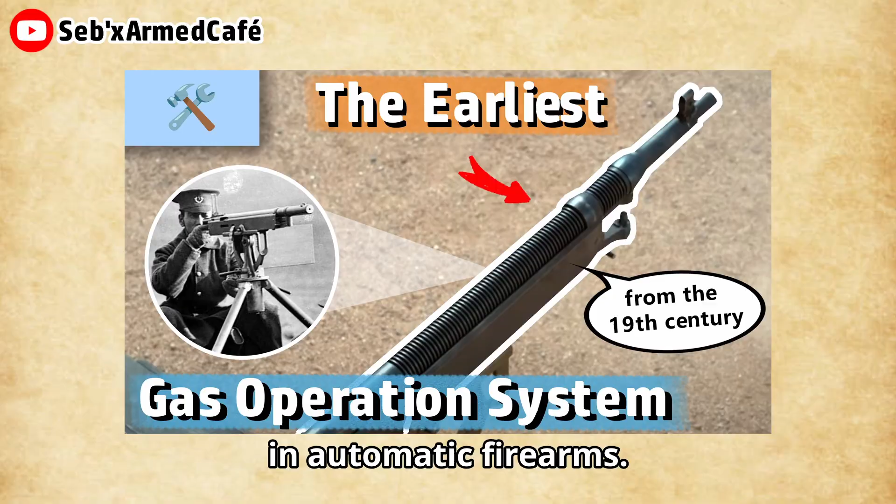Several days ago, we talked about the earliest gas operation system in automatic firearms, including the auto firearms of nowadays. Typically, there's a small hole on the barrel to let a part of the gas produced by the igniting gunpowder of the cartridge leak out, and then this gas can power the piston, which pulls the bolt back.

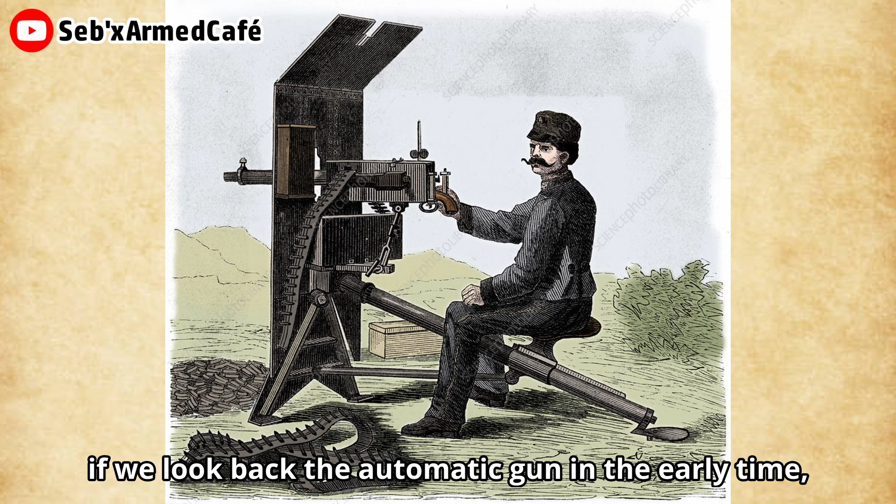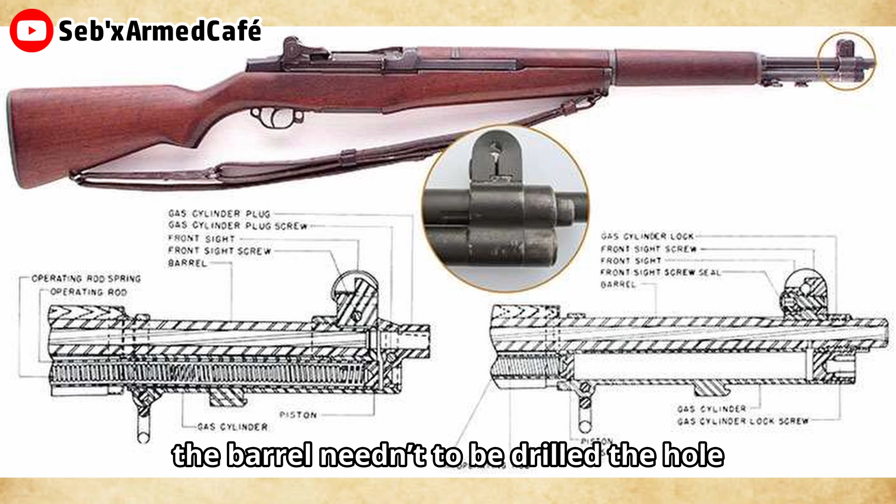This is the most popular gas operation reloading structure. But if we look back at automatic guns in the early time, we find that people had invented another device to achieve automatic reloading. Although it is also a gas operation system, the barrel didn't need to be drilled with a hole for this device. So in this video, let's talk about this gas trap.

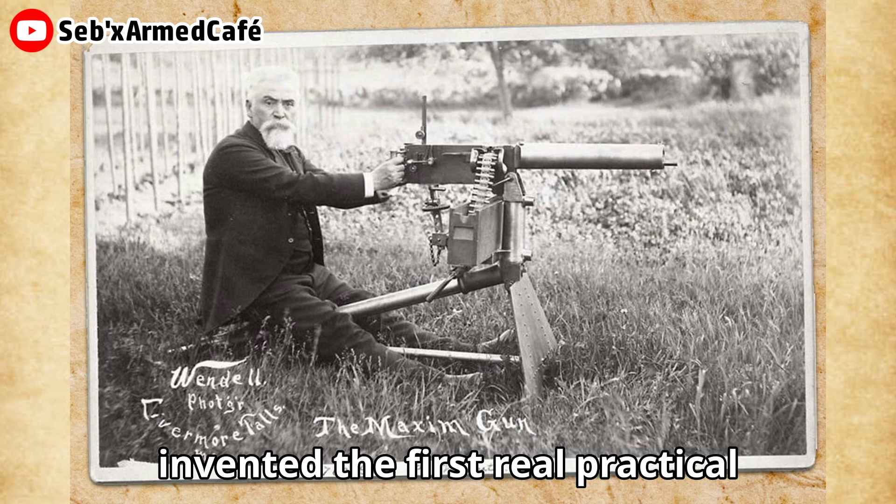If you want to learn about the first gas trap device, we need to go back to 1884. In this year, Hiram Stevens Maxim invented the first real practical and successful automatic machine gun. It's worth mentioning that in this 1884 Maxim machine gun patent, there may be a special cup system, and it was also painted in the patent, which says it might be the forerunner of the gas trap.

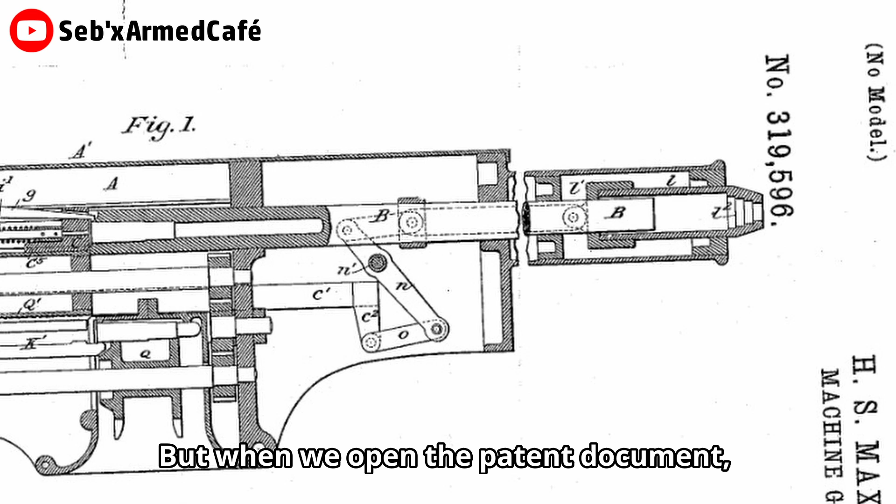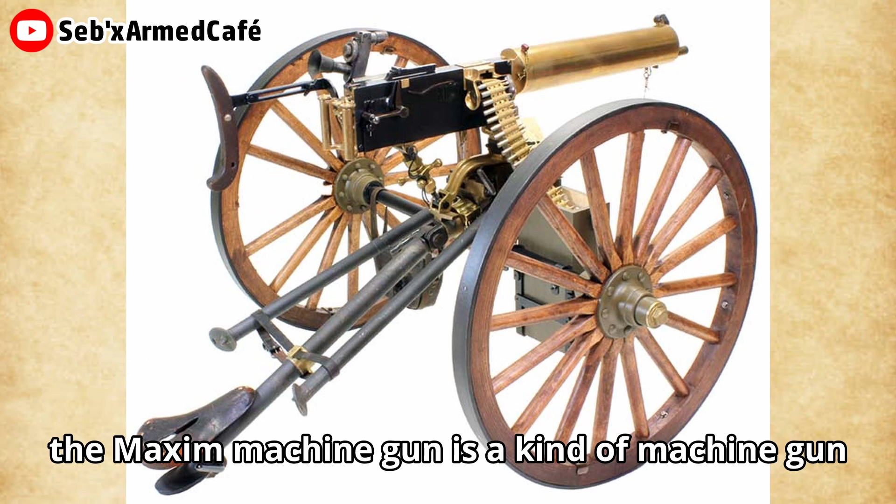But when we open the patent document, it may be very hard to find the same point between the Maxim machine gun and the real gas trap. Additionally, the Maxim machine gun uses a recoil-operated system, not a gas-operated system. So overall, I'm afraid this cup system might not be the real ancestor of the gas trap, but it might still have given inspiration to the gas trap designer. We may have to wait for historians to give us a better answer one day.

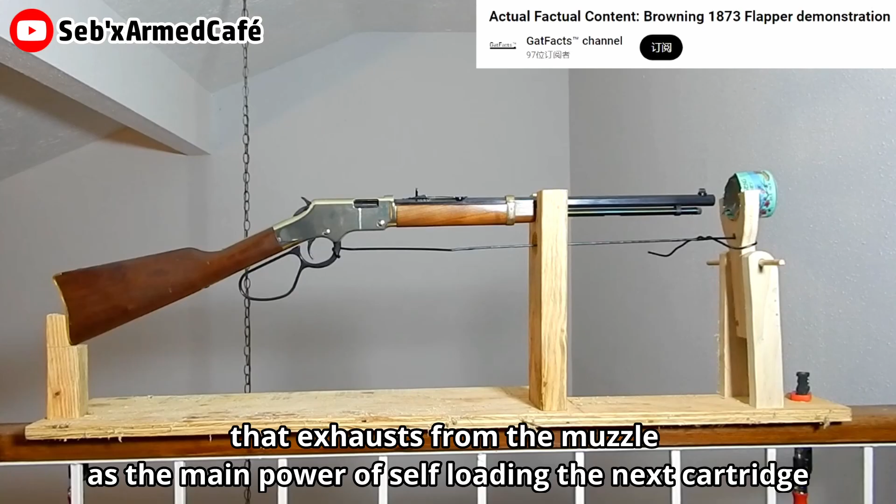What if we must find out which was the first prototype of the gas trap? I think it should be John Browning's flapper rifle. But we must notice that both utilize the gas that exhausts from the muzzle as the main power for self-loading the next cartridge. Both might not have a very close relationship though, because they had very different design ideas. When we see pictures of the flapper rifle and the rifle with gas trap, both just had a similar function in self-reloading.

Basically, the gas trap was used from the 1900s to 1930s in history. For example, according to John Garand's original design as adopted in 1936, the early models of his famous M1 Garand rifle used this gas trapping system. Apart from the M1 Garand, other early semi-auto rifles like the M1922 Bang rifle, the General Liu rifle from the 1910s—both mentioned in my Old Gun Daily Series posts—and also early models of the Gewehr 41 and early versions of the Fusil Mondragon, also known as the Mondragon rifle, have used the gas trap.

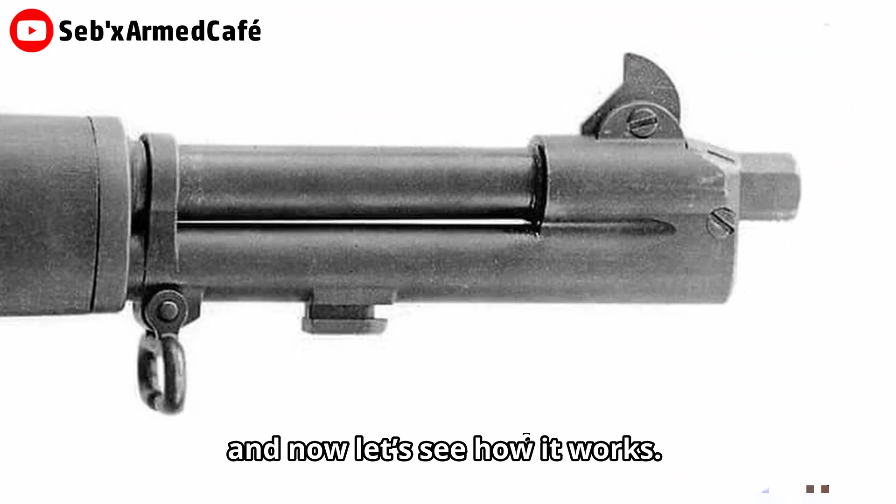When the time entered the 1940s, the gas trapping system was less and less used on new automatic rifles. But why did people decide to abandon the gas trap? We will talk about the reason in the third chapter. And now, let's see how it works.

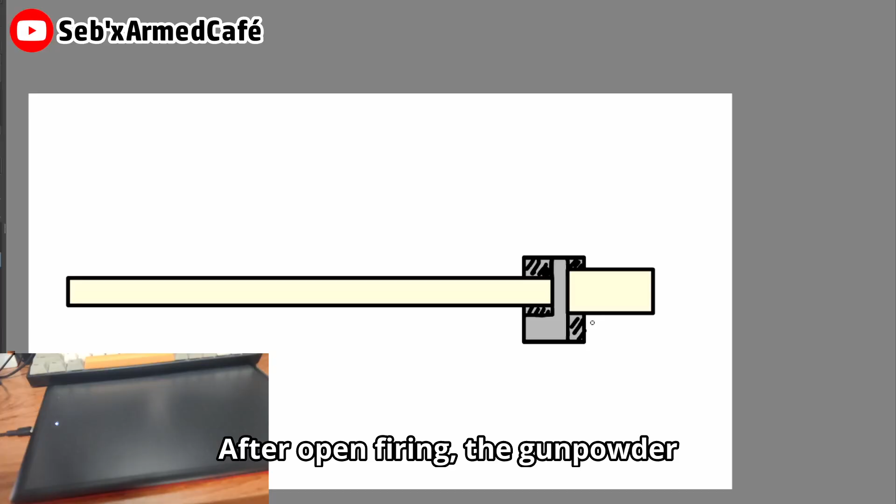The gas trap can be identified as a kind of T-valve for the gas. After open firing, the gunpowder produces a mass of gas, and the gas goes along the inside of the barrel. When the gas arrives at the muzzle location, because of the gas trap set on the muzzle, some gas can be trapped.

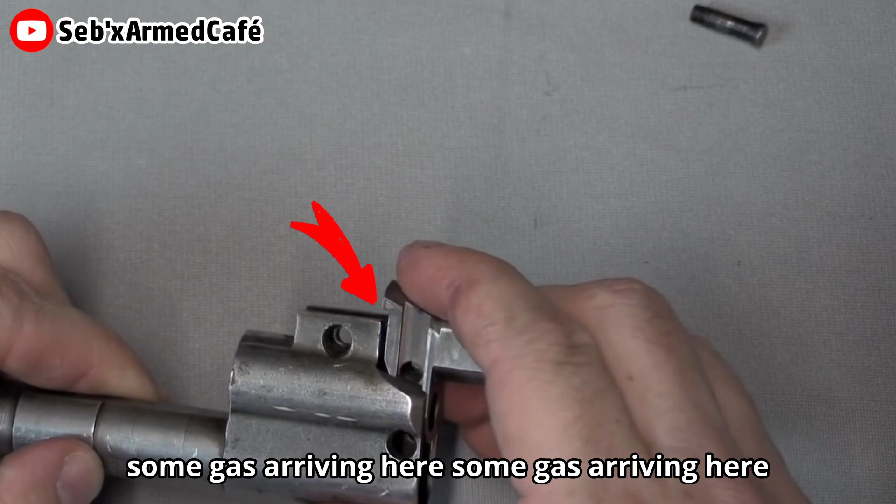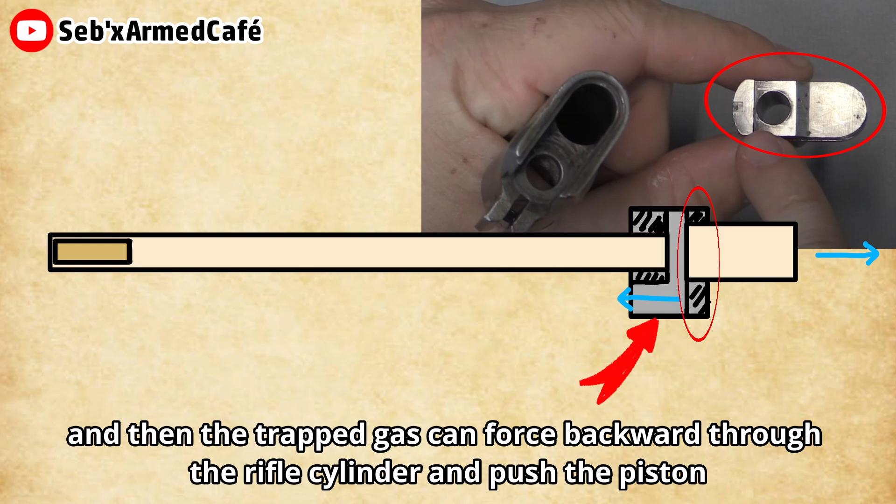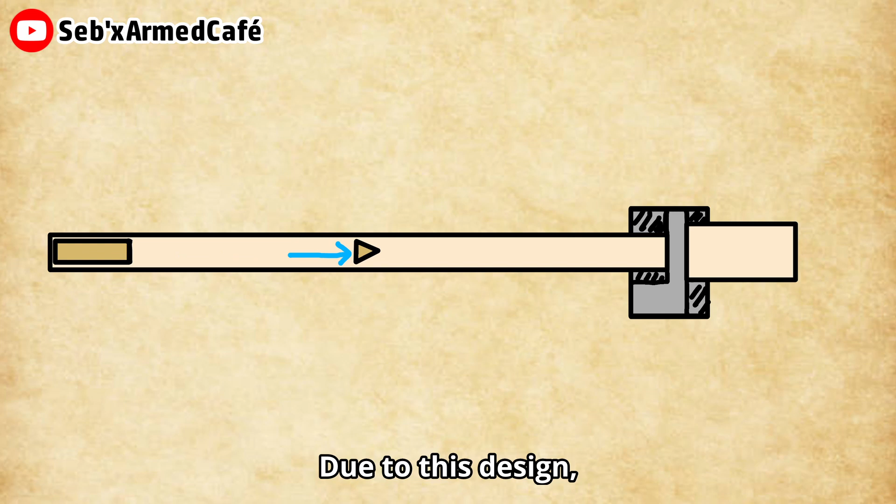In other words, some gas arriving here can turn its direction and go down through the inside space. This part of gas is called the trapped gas, and then the trapped gas can force backwards through the rifle cylinder and push the piston to pull the bolt back. Now the rifle can load the next cartridge. Due to this design, the gun didn't need a hole drilled on the barrel.

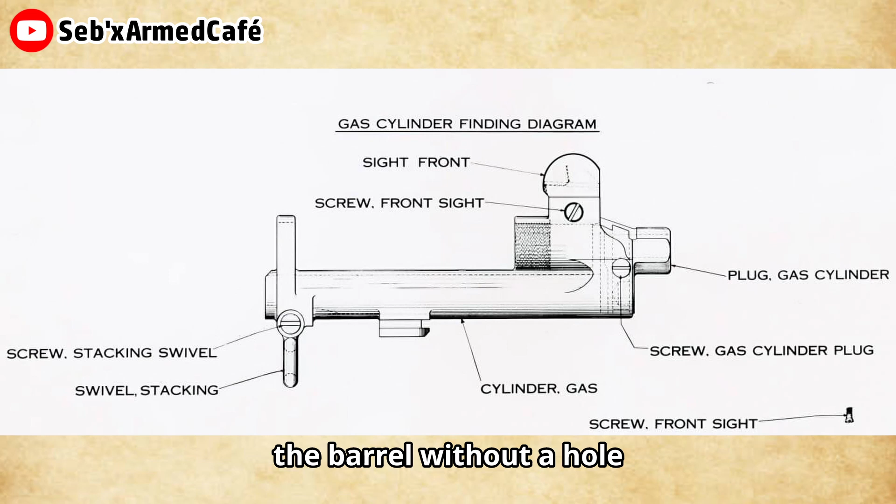Compared with the gun barrel with a hole, the barrel without a hole seemingly is the better and smarter design. But sometimes the real situation is different from the expectation on paper.

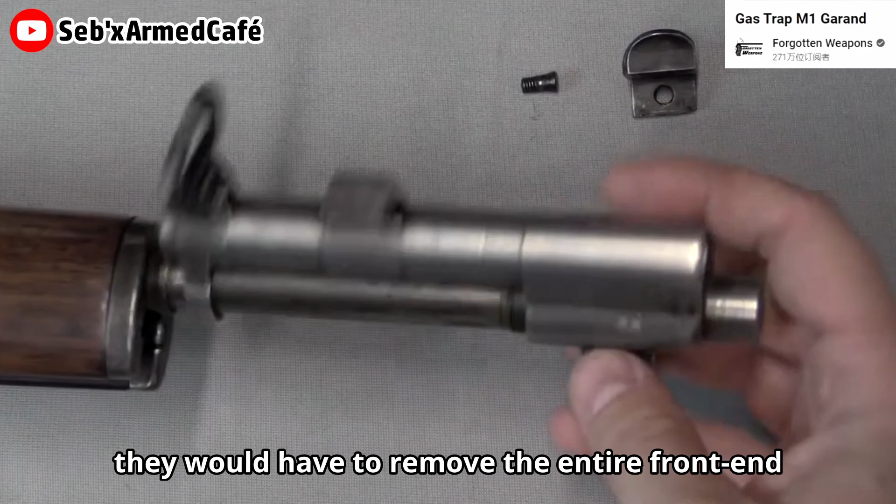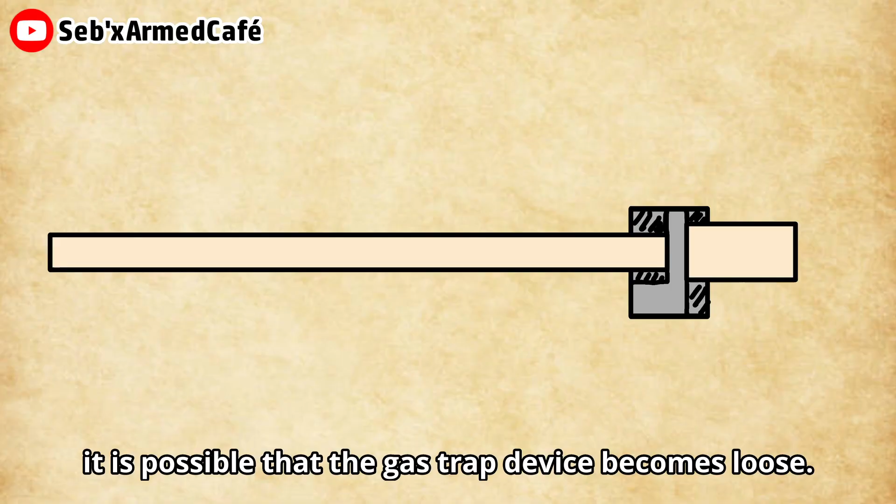We know that cleaning the carbon deposits is a very important part of gun maintenance. Because of the gas trap mechanism, the cleaning job became less convenient. If people wanted to clean it completely, they would have to remove the entire front end and then scrub and oil it in order to clean the hardened carbon deposits. So we can imagine that for soldiers on the battlefield, these serious cleaning steps could be very tormenting. Moreover, it's possible for the gas trap device to become loose.

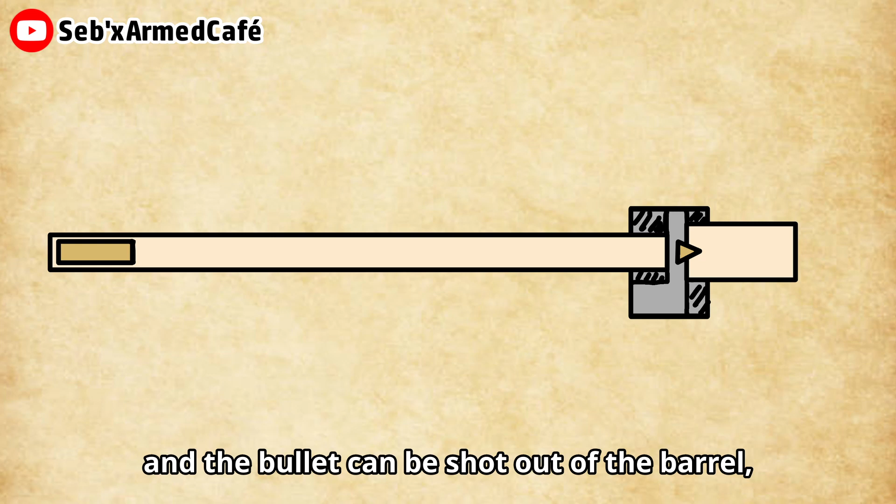What if the user misses a problem? The result will be horrible, because if the device gets a loose plug, and at the same time people open fire, and the bullet is shot out of the barrel, it is possible that the bullet strikes the gas trap device, and it may result in the rifle being blown apart.

So this might be the reason why, after the 1940s, many military departments of countries around the world started to abandon the gas trap concept and accept a gun barrel with a gas hole when they decided to design a new automatic rifle.